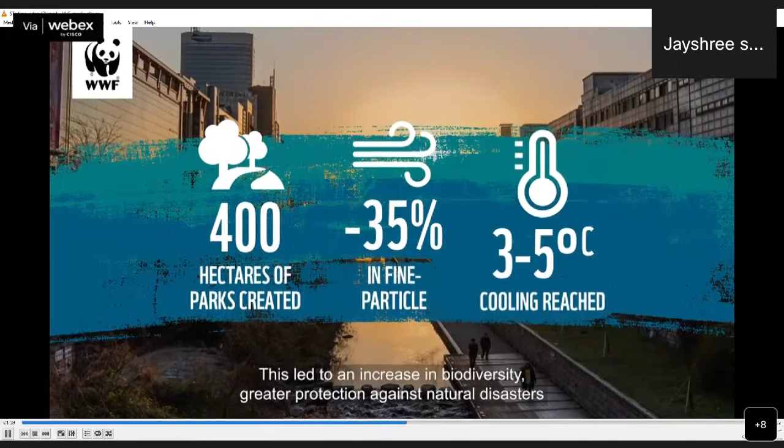Here, the construction of a city highway had buried a once vibrant river under asphalt and concrete, but the highway was removed and the river was restored to its former glory. This led to an increase in biodiversity, greater protection against natural disasters, and many other advantages for both the environment and the people of Seoul.

Across the globe in Medellin, Colombia, the Green Corridors Project has created 36 green corridors between natural areas in and outside the city. These corridors encourage the movement of species, but also have a profound impact on the city itself. Exactly what nature-based solutions may look like depends on the prerequisites and challenges of each city.

Around the world, we find them built into buildings and entire neighborhoods, in the planning of vegetation, agricultural, and forest areas, in the restoration and preserving of rivers, and by the sea to create living shorelines. Cities all over the world, of all shapes and sizes, are now making nature part of the solution.

They have realized that urban nature-based solutions can address multiple challenges, including climate change, biodiversity loss, natural disaster prevention like extreme weather, and food and water shortages. Join us later on when we dive into the different examples of urban nature-based solutions and how they can make our cities even better.

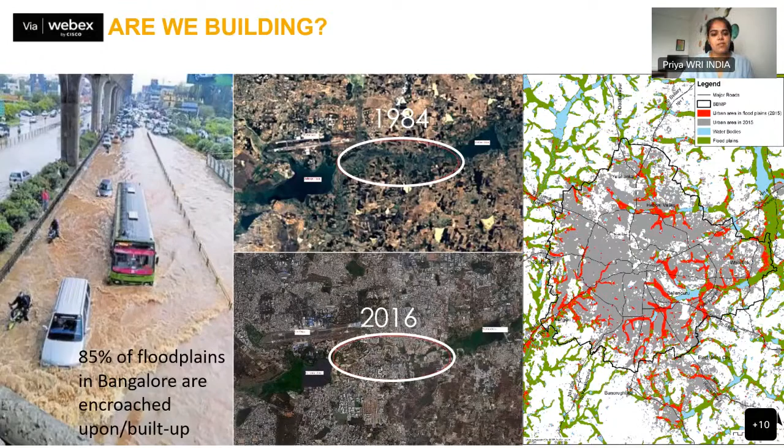I mean, this is there all across the globe. And in the South Asian countries, I think this is very prominent that flooding is a major issue, urban flooding. And the other extreme events, as we all know, 5 out of 20 Indians are highly vulnerable to all three of these extreme events, primarily floods, droughts, and cyclones. And primarily the hydromet disasters are in a way human induced, especially in the urban areas.

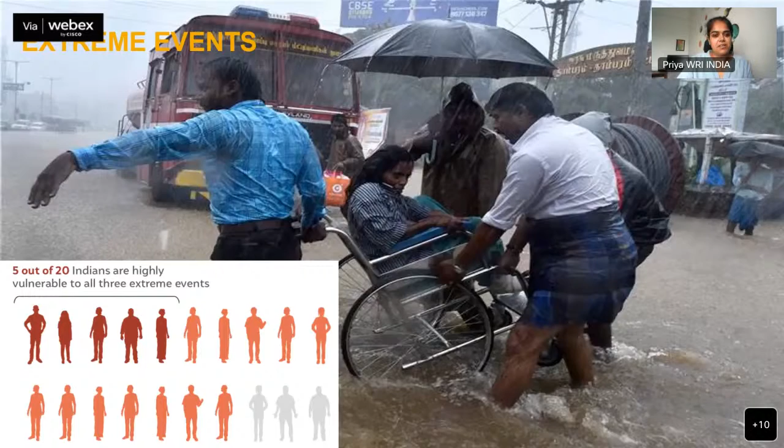And this is just a glimpse of how heat really is impacting millions of Indians, and this is going to be the major disaster in India in the coming years. And the biggest opportunity for us, 75% of India's infrastructure is yet to be built. So there's a huge potential for twisting all our grey infrastructure into a hybrid green-blue integrated infrastructure. So that's the biggest potential for Indian cities.

And I'm jumping directly into nature-based solutions, and what it encompasses, I think everybody is aware of, and what it addresses is societal challenges, climate change, poverty, resource efficiency, and use. So there's a large amount of data and evidence to show that nature-based solutions at multiple scales really have immense impact. So at the plot level, at the neighborhood level, at the city level. So they have their own ways of mitigating and adapting to climate change.

So simple infrastructure changes like having a permeable paver rather than a cemented paver really would help a lot of cities in mitigating, I wouldn't call it flooding, but just waterlogging in front of their houses or offices, etc. Just having simple rainwater harvesting percolation pits would also really mitigate waterlogging.

Rooftop gardens, home gardens, these are small measures that could really not only be beneficial for the environment in the long run by mitigating heat effects, but also be useful in rainwater harvesting and also in increasing the biodiversity in the city space. So these are just examples of how at the plot, neighborhood, and city level, these small interventions really can impact and help mitigate climate change and also improve basically the entire ecological space.

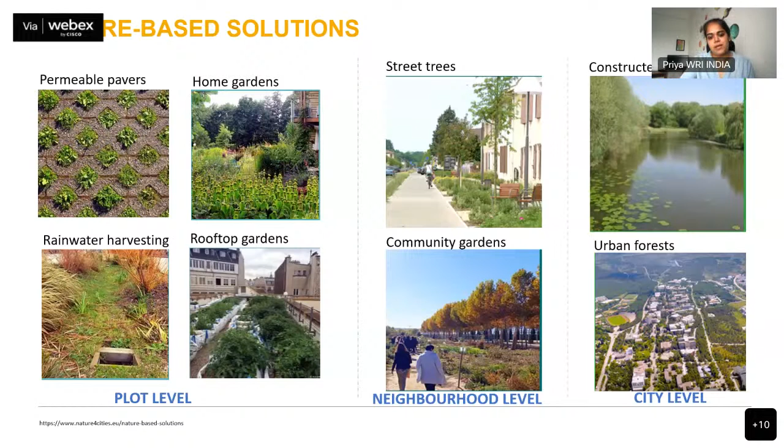So at the city level, constructed wetlands and urban forests, these are really big interventions that can help carbon sequestration, help completely recharging the hydrogeological cycle, and the constructed wetlands can even act as pisciculture areas or aquaculture areas, which could really promote the livelihood also in the areas around. So these are some examples of nature-based solutions at multiple scales.

And I really don't have to reiterate the core benefits of NBS. So one is carbon sequestration, improved biodiversity, increased access to green spaces. I think through COVID, that's one of the things that has come up. Access to green spaces is something we all look for, mitigating heat and also mitigating flood. And how do you prove that NBS is effective?

There's a lot of evidence, and within India, we have the Smruti Van, or the urban forest in Pune. So this really is an example of how the community, the municipal corporation, and the neighborhood intervention has resulted in having a beautiful urban forest within the concrete jungle in a city. And there's another example from India, that is a rain garden under the Begumpet flyover. And there are multiple other examples across cities in the world.

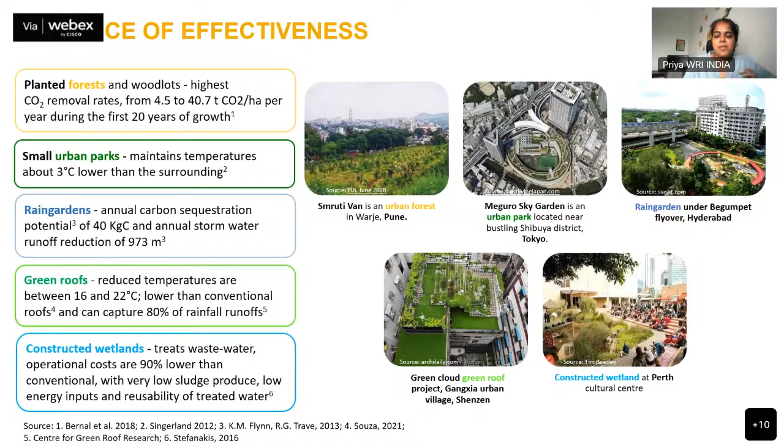And on the left, you would see how these small scale interventions really reduce the temperature and improve carbon sequestration potential. Having a constructed wetland to treat wastewater reduces operational cost compared to having a conventional wastewater removal mechanism. So these are some evidences of effectiveness of having nature-based solutions.

And this is just a very small example of how the urban horticulture initiative in Chennai, the rooftop gardens, is really trying to improve the heat resilience in Chennai. So this is a small program which is trying to utilize the rooftops and vacant spaces, and also capacitating people to empower themselves to not only produce their own food, but also use it as a means of self-employing themselves. So these are all small urban examples that are happening in India.

And regardless of the amount of co-benefits that nature-based solutions have, there are some very key challenges to operationalizing these urban nature-based solutions.

And one is the limited number of solution providers. So I think the platform is really going to open up space for more solution providers to come in. And the other is unavailability, inadequacy in land. So land for implementation is something that we realize, when it comes to NBS, the cities are often very dense and land becomes a very big question.

The other is lack of ownership and maintenance. So this is one very important thing, because through the life cycle of a project, just implementation of a project, or starting up a tree planting drive or water clearing or restoring a water body, is not enough, but the operation and maintenance and ownership of that space needs to be taken.

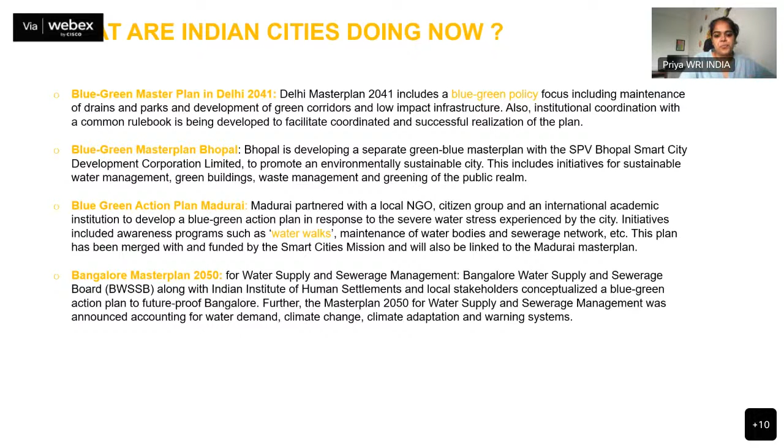So I'm just jumping into what we have been doing, because this is one example of how we've tried to operationalize NBS. Just to give you an introduction of the Cities for Forest platform: Cities for Forest is a global initiative, and 3 cities in India have signed on to it: Kochi, Mumbai, and Hyderabad. In Kochi, we started on ground, enabling the Kochi Municipal Corporation to move towards a resilient city and shaping a resilient city chapter for Kochi.

And then around 2020, we conducted a Mapathon, tried to identify spaces that have the potential for tree planting or any other kind of restoration activity. In 2021, we did the implementations on ground, and by 2022, we have really enabled the city to include in the municipal budget specific funds for taking up activities towards mitigating and adapting to climate change.

So I'm showing this example because to operationalize NBS, one of the key things that we understood is that it's not about these small piecemeal projects that we do on ground, but how are we going to really help cities take this forward? And cities can only take it forward if they earmark funds, if they take climate action seriously and put it in their municipal budget, or if they are able to redirect their finances from the state climate action plan, or from any other mission that the state and national legislations provide them.

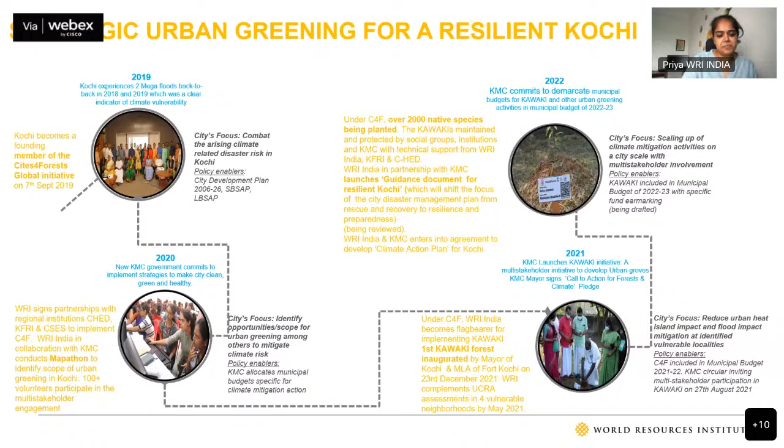So unless they have the capacity to say that we have this issue and this is a major issue that we want to take climate action and really look forward for the budget, to do any kind of implementation, water body restoration, or any kind of activities on ground, it becomes really difficult. So we strongly believe that we need to really influence the policy mandate at multiple levels, be it at the local body level, or at the city, or at the state level.

So just in a way of that, we launched the India Forum for Nature-Based Solutions. This is what WRI launched along with NIUA and a host of other partners. We launched it at the World Urban Forum at the end of June. Here we're trying to bring across India a similar language on NBS. Like I said, people are always talking about ecosystem-based services, adaptation, everything. So we're trying to get this shared language of what NBS really is, redirecting investment towards NBS, because like I said, the gestation is too long.

And how do you really help the investors to invest in an NBS, or invest in a solution that is useful for the cities, and influencing national, subnational policies, and mainstreaming NBS itself in the city planning process. So these are some things that are in progress through the India Forum for Nature-Based Solutions. And we have a bunch of people here: public, private, academia, NGO, and citizens. And we are primarily focusing on the private investors.

At the city level, we are focusing on the municipal corporation, who are able to then identify one or a few bankable solutions, and they're able to move towards these investors and say that we really need to, for example, restore the canals in Kochi, or some green space in Jaipur. So we are able to influence these cities to ask investors what they need. It's not private investors' pilot implementation, where most often there's no ownership from the city. So we are just trying to push through the forum and through the Cities for Forests platform that all are city-led, community-led, and it does not go in a standalone manner.

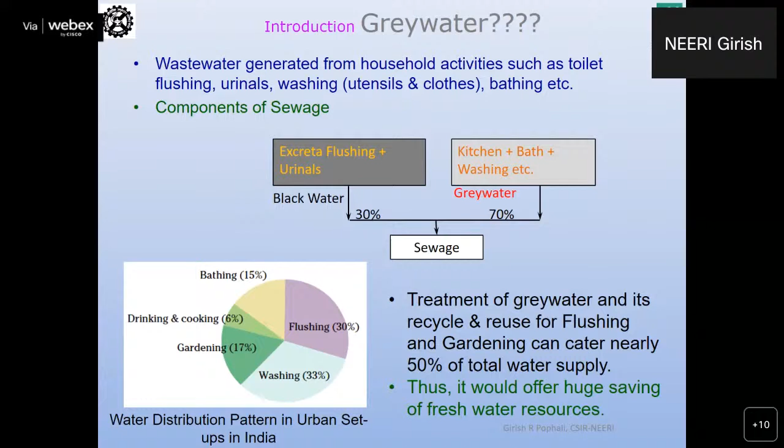This is a very important aspect of governing regulations, because we need to know to what level we require treatment of sewage or grey water, because that decides the treatment method selection. For sewage, we do have discharge standards, which are now referred to as NGT norms, because these norms have yet to be notified by MoEF and CPCB.

So, for example, we have these norms: BOD less than 10, suspended solids less than 20 or 10, COD 50, total nitrogen 10, total phosphate for discharge into ponds 1, fecal coliform desirable 100 and 230. So these are the norms available for sewage. Next slide, please.

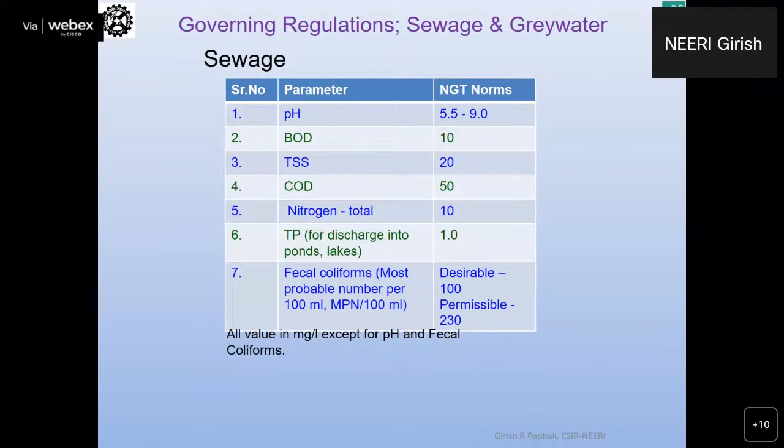But as far as grey water is concerned, there are no specific standards for treatment and recycle or reuse for grey water prescribed as yet in India. There is one report or manual prepared by CSIR-NEERI along with UNICEF in 2007, in which suggested guidelines were prescribed for grey water quality, but that is related only to bacteriological quality, and one only reference of BOD, that is also from CPCB, that is class A water.

So as such, we do not have any standard or treatment method which will say that to this level we should treat gray water, and then that will be useful or fit for recycle and reuse. So whatever gray water treatment is being done presently, we are using only the sewage standards to that level we are treating. So this is a very important aspect if you want to manage gray water and reuse it for any non-potable or for that matter any potable purpose. So this is one important aspect in gray water treatment and management. Next slide, please.

A brief about nature-based solutions. The environmental cleansing mechanism that ensures reduction of pollution levels by means of physical, chemical, and biological transformation without any human intervention can be referred to as a nature-based solution. Some of the examples include inert solid removal through filtration; this is a physical process. Metal removal through soil sorption is a chemical process. Nutrient uptake by plants, that is phytoremediation. And organic matter removal by microorganisms is a biological process. So NBS is basically a combination of all these processes which we imitate from nature.

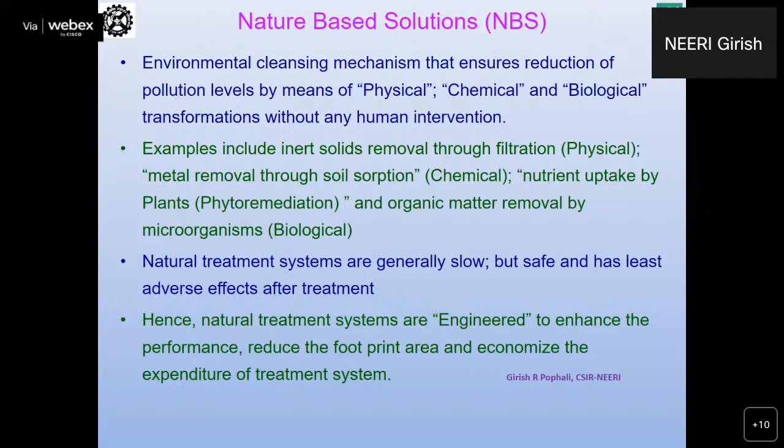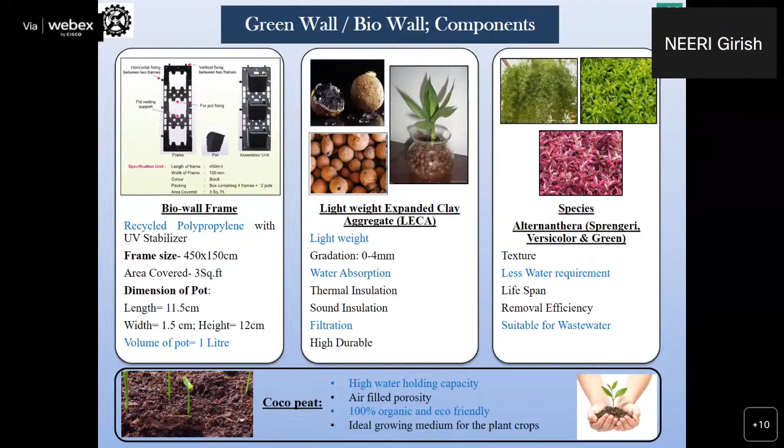Another filter media used to fill the pot is coco peat. It has high water holding capacity. Due to porosity, some air is also filled, and it is 100% organic and eco-friendly. So these two combinations of coco peat and LECA offer a physical process of separation of solids. It also helps water to be retained in the filter media and allows some microbial growth, and thereby some organic matter is removed. So physical process takes place, biological process takes place, and the plant uptakes the nutrients. So this is the function of the green or bio wall. Next slide, please.

Yeah, this shows the experimental setup and wastewater, grey water characteristics. If you look at the characteristics of grey water, they are quite dilute as compared to sewage. It has BOD 48 to 70, COD 64 to 92. Normally, if it is sewage, it varies about 150. If it is for sewage, COD goes about 250 to 300.

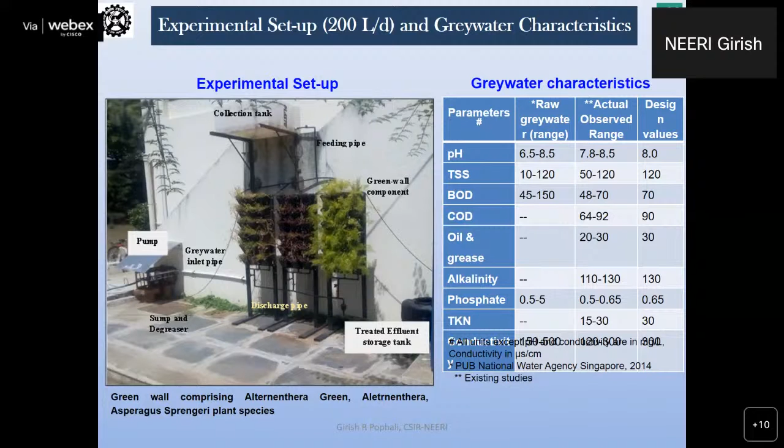So BOD of 70 was reduced to 48, COD from 90 to 68, and oil and grease was also substantially removed from 30 to 16. So it resulted around 40 to 47% removal of oil and grease at the outlet of the degreasing tank.

So the idea is we must analyze the characteristics of grey water, because grey water characteristics vary hugely, because they originate from different sources. So we don't know from which sources we are collecting. If it is from all the sources, then the grey water characteristics will be different. But here in this case, it was only from the bath area of that swimming pool. That's why we have prominent oil and grease in this section. Next slide, please.

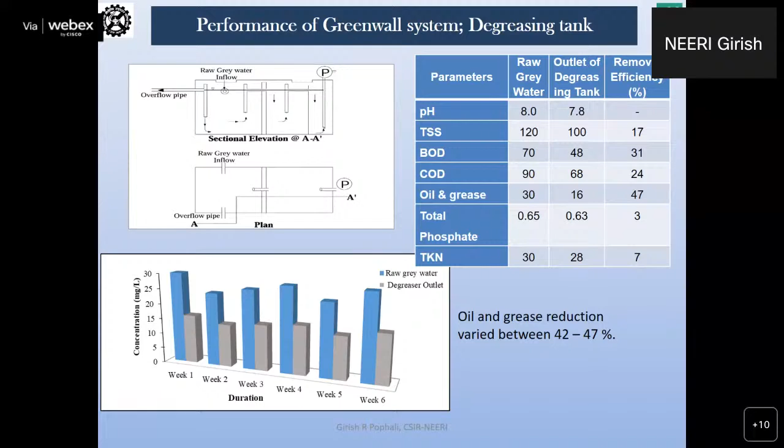Then, well, I have a lot of data on this, but I would like to cut short just to show you that treatment with light expanded clay aggregate, that is LECA, we had good performance, satisfactory performance in terms of COD, TKN, and total phosphate removal. But BOD removal was not up to the mark. But again, up to the mark means we had no standard, so we compared with the NGT norms, and in that aspect, BOD was not reduced to less than 10 milligram per liter.

The reason was our maximum retention time was around 12 hours with that LECA soil. So to increase the water retention and subsequent treatment efficiency, we used coco peat in equal proportion that was mixed with LECA. Next slide, please.

So after using combination of LECA soil and coco peat in equal proportion, we got very good water retention capacity, and then we could run the system at different hydraulic loading rates, or you can say hydraulic retention time. You can see that it started from 18, 16, 14, and 12 hours. We first loaded the system with minimum flow that resulted in maximum HRT, and subsequently we went up to 12 hours retention time. And then we observed that combination of LECA and coco peat provides higher water retaining and hence higher hydraulic retention time, which enhances the performance of green wall.

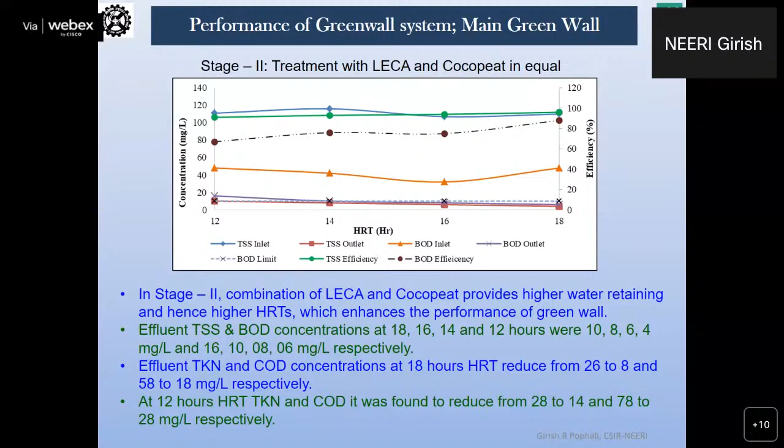So this indicated that grey water treatment is possible using green wall, which offers around 14 to 16 hours retention time. We can substantially treat it, and that will give us that quality of water which can be reusable in garden, or at least for toilet flushing, which will not have any adverse effect. We have also monitored the fecal coliforms, which were also reduced to less than the permissible limit of 230 and 100. Next slide, please.

So, advantages of nature-based solutions, which are quite obvious. They are highly techno-economical and environmentally sustainable, and require low capital and O&M costs. They do not require skilled manpower. All that you have to do is to just provide these plant-based media, and you have to just set the flow rate, and automatically water gets filtered.

Significant treatment efficiency with the removal of primary and secondary pollutants. The treated effluent can be used for non-potable purposes like gardening, floor washing, flushing, and green belt development. And in particular, if you have a lot of green wall systems, they can significantly reduce the fresh water demand, reduction in carbon footprint area. They also help in temperature control, and of course, they are aesthetically and socially acceptable and economically feasible.

This particular system was set up at only around 20,000 rupees for 200 liter per day capacity. So you can see that you can save a lot of fresh water, which is otherwise used, and that cost can be recovered if you save that fresh water cost, because fresh water costs you around 20 rupees per meter cube in urban setups.

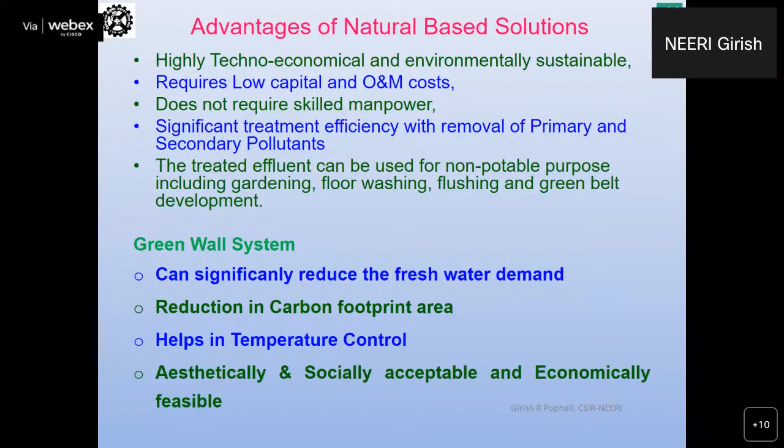Next, please. So some conclusions and recommendations. Grey water treatment and management using green wall gives us an opportunity to conserve the environmental resources and serve the society at large. Government bodies, public sector, private industries, and municipalities can target to conserve the fresh water using grey water treatment and reuse for non-potable purposes.

Another important recommendation would be it is essential to formulate treatment and discharge standards for grey water with recourse to recycle and reuse, because presently we do not have any target value. So to what level we should treat it so that it will be amenable for recycle and reuse.

I did not include some of the conventional technologies which are also prominent in grey water treatment, since the topic is on nature-based solutions. But there are certain technologies like simple filtration or sedimentation using chemical coagulation and flocculation. But those methods actually create another problem like sludge handling. So the natural system or the green wall concept has an edge over conventional systems. That's also one of the important advantages of nature-based solutions.

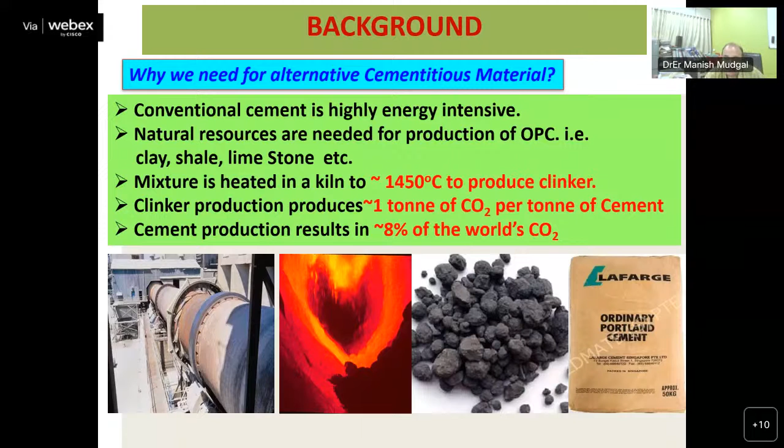So the background is why we need alternative cementitious material. I told you that cement is highly energy intensive. Around 1450 degrees centigrade temperature is required to produce clinker, 1 ton of cement produces around 1 ton of carbon dioxide, and cement production results in 8% of world carbon dioxide. So you can see it's highly energy intensive, and it is not an eco-friendly process.

So we have thought of using fly ash as an alternative material for development of this technology. And what is fly ash? Fly ash is a byproduct of finely divided residues resulting from combustion of pulverized coal in thermal power plants. And in India, we are generating 226 million tons of fly ash per annum.

Friends, we are producing 230 million tons of cement per annum in India. So the amount of cement production is equivalent to the amount of fly ash generation in India. It is an aluminosilicate material with a fine particle size distribution, a combination of glassy and crystalline phases, and it has

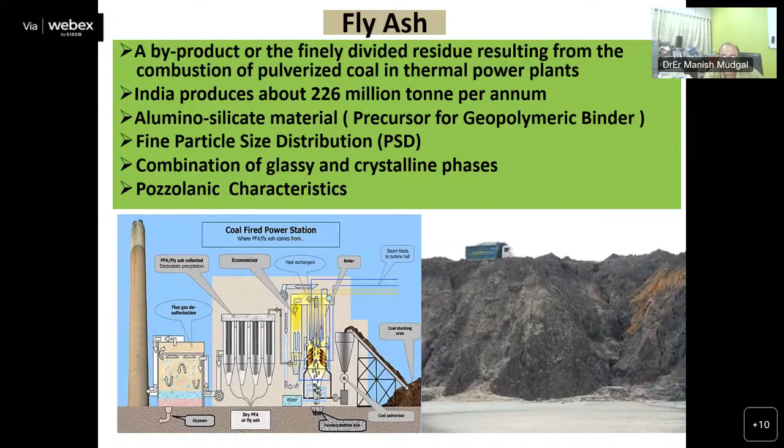pozzolanic characteristics. The data we got from the Central Electricity Authority, New Delhi, 2020, is that we are generating 226 million tons of fly ash from 197 thermal power plants in India. If you see the forecasting, in 2030-31 we will produce around 600 million tons of fly ash in India. So you can imagine the quantity of fly ash that will be generated in India.

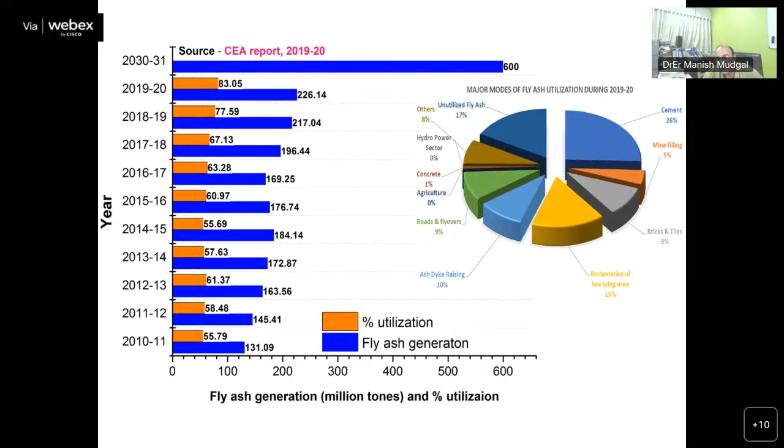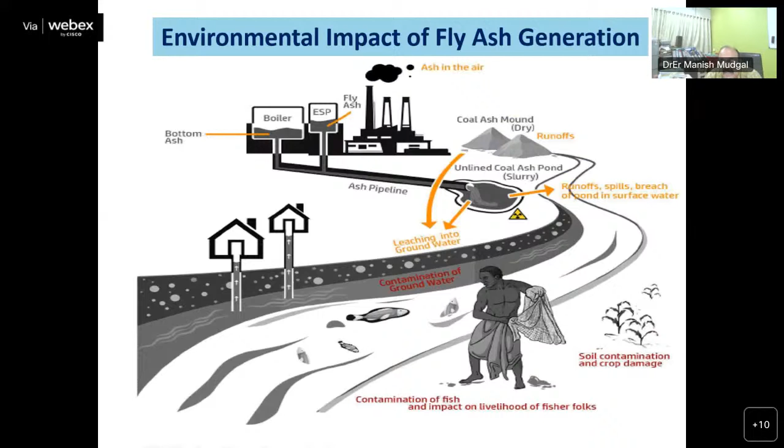The utilization is very minimal, and I have shown you utilization of fly ash in different sectors. The environmental impact of fly ash generation is on the air environment as well as the water environment and land environment, and if we throw the fly ash on the ground, it will degrade the environment in all aspects.

It is only a change of mindset. For the last 200 years, we have been using cement concrete. हम जो घर में सोते हैं, हम घर में रहते हैं, that is made of cement. Dear friends, I am just telling you, we have the confidence to sleep under a rooftop made of concrete. Our mindset is at the level that we are confident this will not fall down. So इतना confidence होने के बाद we are sleeping under that rooftop.

Now there is a need for a change in mindset, that this waste can be utilized to make wealth out of it. And how can we do it? We can do it by converting it into geopolymeric binder. I have been working in this particular field for the last 15 years. I have guided around 25 MTech students and 5 PhD students on this geopolymeric concrete work and R&D development, and carried out a number of projects on the development of this technology.

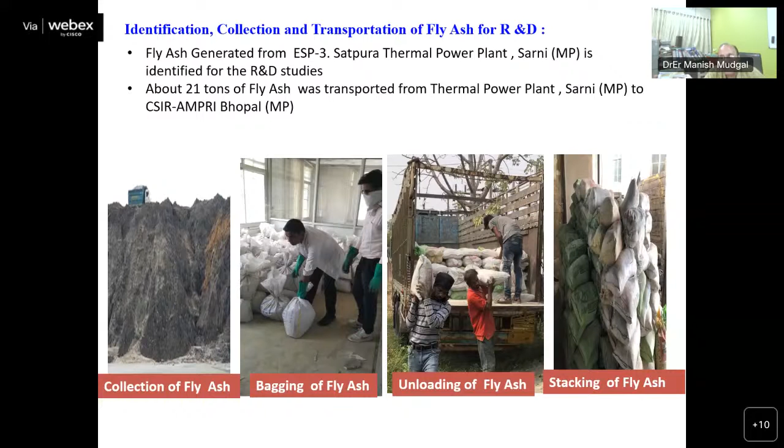I am working on bulk utilization of waste. That's why we have collected around 21 tons of fly ash from the nearby thermal power plant at Sarni, a Government of MP thermal power plant. We have characterized this fly ash and found that it is a silico-aluminous material. Silica content is 58.63%, alumina 27.7%, and iron oxide 6.5%.

If we go through the Indian Standard IS 3812 Part 1 for pulverized fuel ash specification, where this ash is added with cement to make pozzolanic Portland cement, as per this IS code, if the combination of silica, alumina, and iron oxide is more than 70%, it is class F fly ash. So the fly ash we have collected from this thermal power plant is class F fly ash.

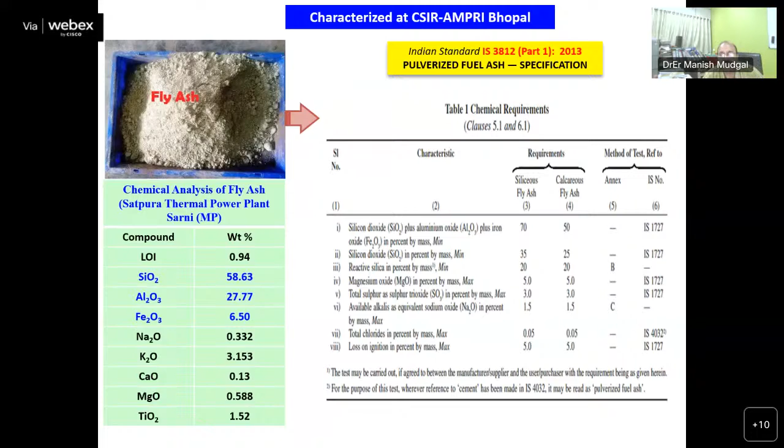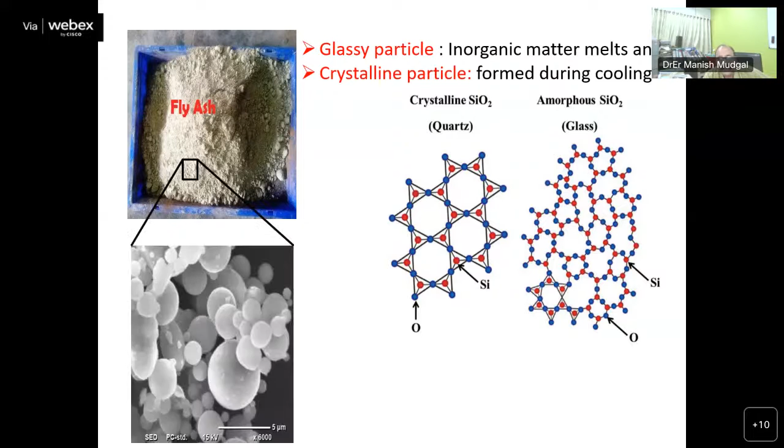We have thoroughly characterized this fly ash with XRD, particle size distribution, FTIR, scanning electron microscopy, and even transmission electron microscopy. It contains glassy particles and crystalline particles, basically quartz and amorphous silica. And this is the base material we have used for geopolymer making.

So what is geopolymer? It is a green material. It generates 80% less carbon dioxide, with low consumption of energy and water, better durability, a simple process, and a wide range of applications. That's why it qualifies as a green material. Professor Joseph Davidovits from France is the inventor of this geopolymer.

In 1978, Davidovits proposed that an alkaline solution could be used to react with silicon or aluminum in a source material of geological origin or in any byproduct material such as fly ash, rice husk, or clay to produce binding material. So he said that if any silico-aluminous material is reacted with alkaline solution, the binding material will be a viscous binder, and he coined the name geopolymer.

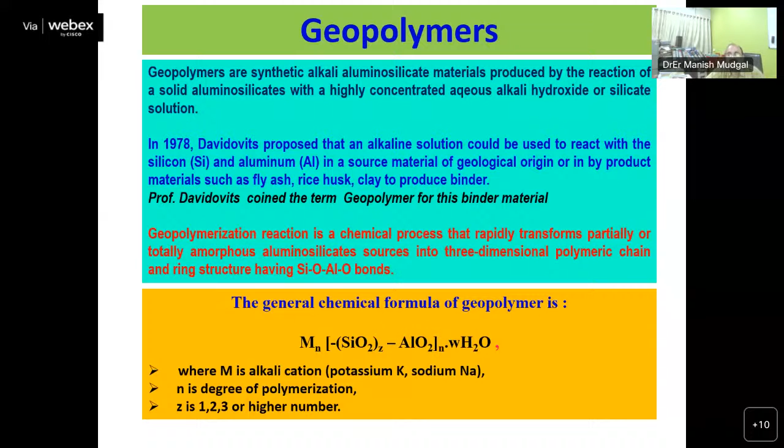It is not an organic polymer. It is an inorganic polymer. You can say it behaves like a polymer material. So the geopolymerization reaction is a chemical process that rapidly transforms a partially or totally amorphous aluminosilicate source into three-dimensional polymeric chain and ring structures having Si-O-Al-O bonds.

The aluminosilicate material can be fly ash, slag, metakaolin, silica fume, or rice husk ash. Any one of them can be utilized. The alkaline activator may be sodium hydroxide, potassium hydroxide, sodium silicate, or potassium silicate. And if we see the mechanism, it involves solid dissociation, polymerization, gelation, setting and hardening, and solid state transformation of aluminosilicate gel.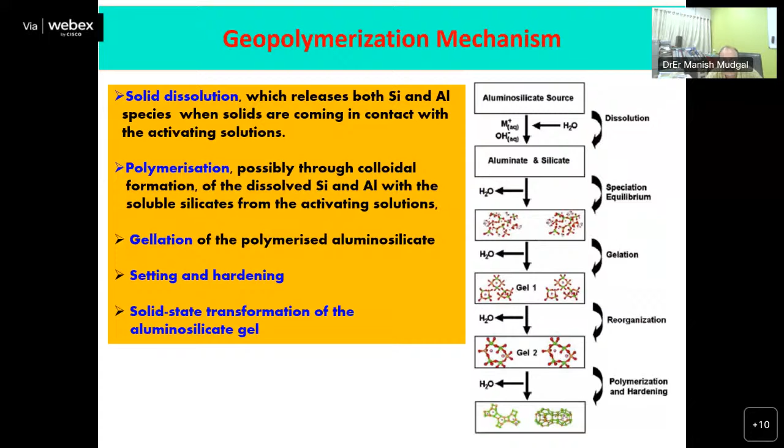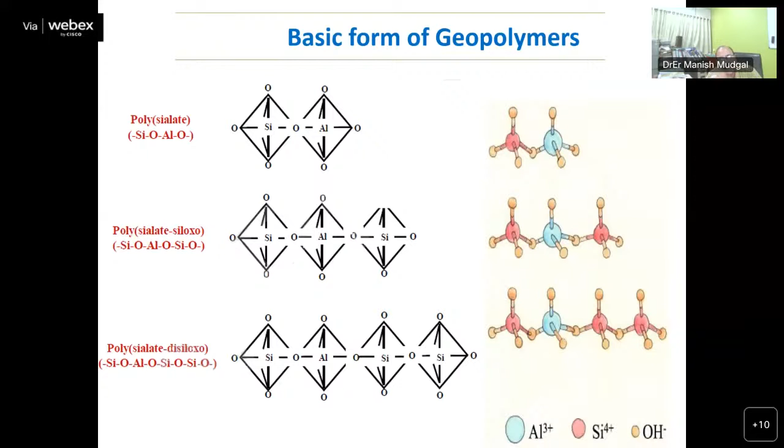Basic forms of geopolymers are polysialate, polysialate-siloxo, and polysialate-disiloxo; different stages are there. Two different scientists, Davidovits and Barbosa, have given different models. The basic raw materials required for this geopolymeric concrete are class F fly ash, as I told you, sodium hydroxide and sodium silicate, and the conventional fine and coarse aggregate we use in concrete.

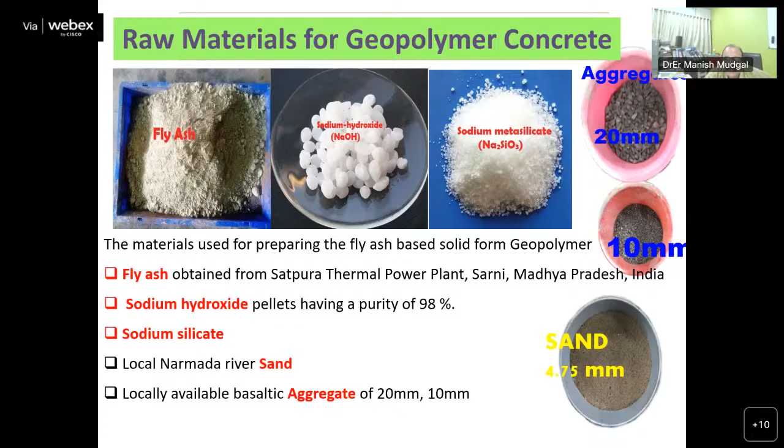Friends, if we compare Portland cement and geopolymer binder, Portland cement needs 1450 degrees centigrade for making clinker, while for this process we only need 35 to 80 degrees centigrade. So cement production is an industrial production; this concrete can be made at your doorstep. In Portland cement, when we add water, there is C-S-H gel formation to harden it and get the strength.

Whereas in this system, there is formation of a Si-O-Al bond 3D network, and only with the drying mechanism you can get the strength. So this geopolymeric concrete does not require any water curing. We have calculated the carbon dioxide emission from this geopolymeric binder: it generates 83% less carbon dioxide, only 0.17 tons of carbon dioxide per ton of geopolymeric binder.

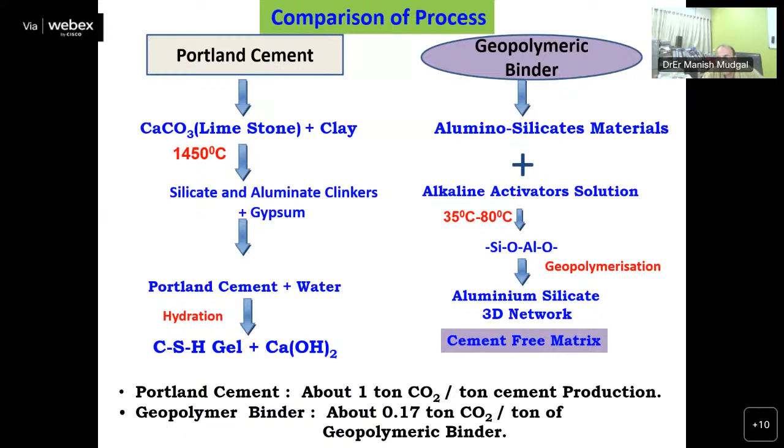If we compare the engineering properties, this concrete is segregation-free. It does not require water curing. Another advantage is that it is high temperature resistant. It is resistant to sulfate and acid, with low shrinkage, low thermal expansion, low creep, and excellent durability. What I have shown you till now is the R&D part and literature review.

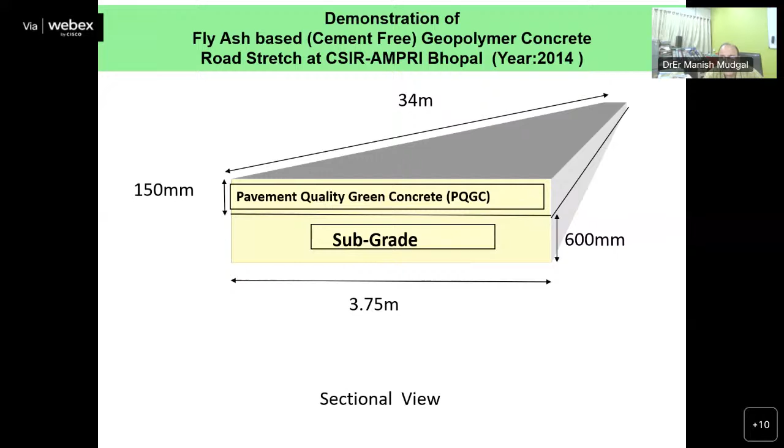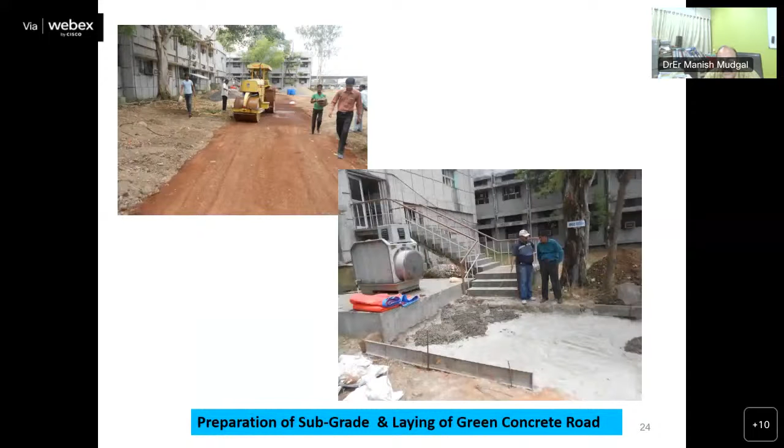After developing this binder, my colleague scientists asked me to do a demonstration in the campus. So in 2014, we demonstrated a 3.75 meter by 34 meter road stretch in our campus. These are the photographs of 2014. By physically seeing, you cannot differentiate between this concrete and cement concrete. The color is the same because fly ash color is similar to cement. And we could do this demonstration with conventional equipment.

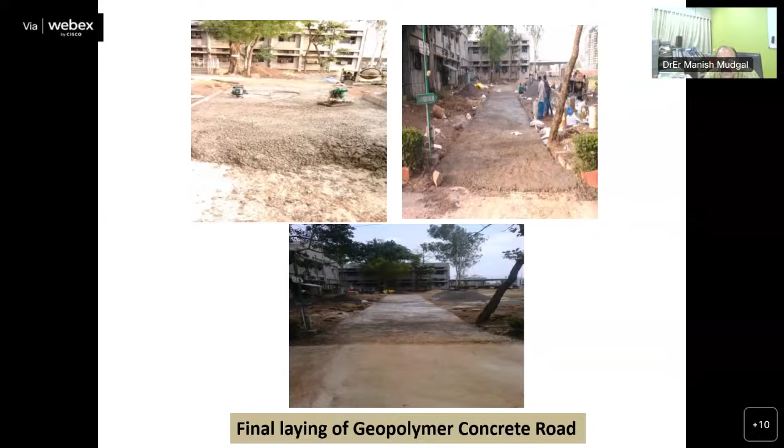The road patch we demonstrated in 2014 had a strength of 35 MPa and flexural strength of 4 MPa. At that time, the slump of this concrete was very low, because we made it with liquid alkaline activators. This is the limitation of this process: its workability is very low, it requires 35 to 40 degrees centigrade temperature, and bulk handling of alkaline activator solution is needed. In this demonstration, I used 8 tons of fly ash.

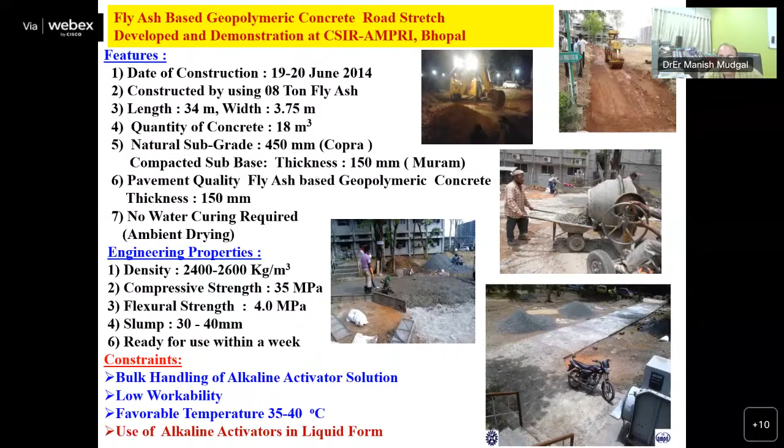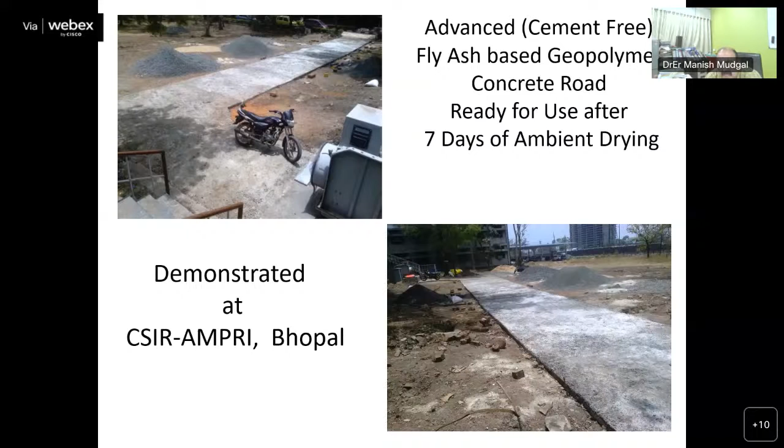Friends, this road is still being utilized in my campus, used by my colleagues in AMPRI Bhopal. Every year we go for core cutting of samples, and the strength is increasing day by day. Now the strength of this road stretch is M39, meaning 39 megapascal.

Then we improved this process and fine-tuned the technology, and with the improved process and a solid form alkaline activator, we demonstrated this road stretch at the All India Institute of Medical Sciences, Bhopal. This is the RM800 plant we used. These are the photographs of the demonstration of cement-free concrete road at AIIMS Bhopal in 2017.

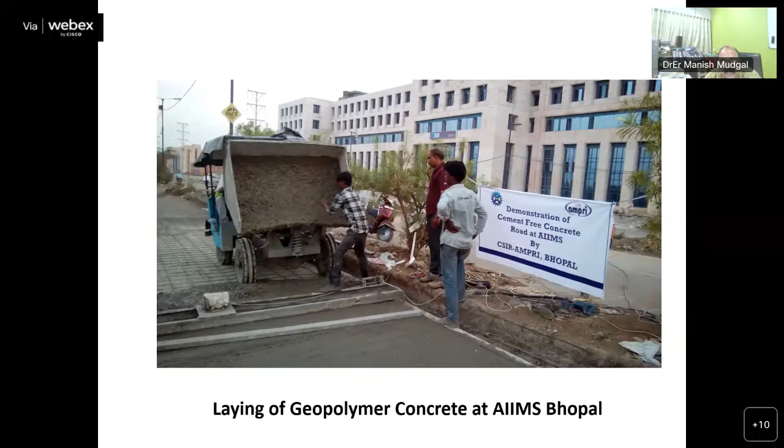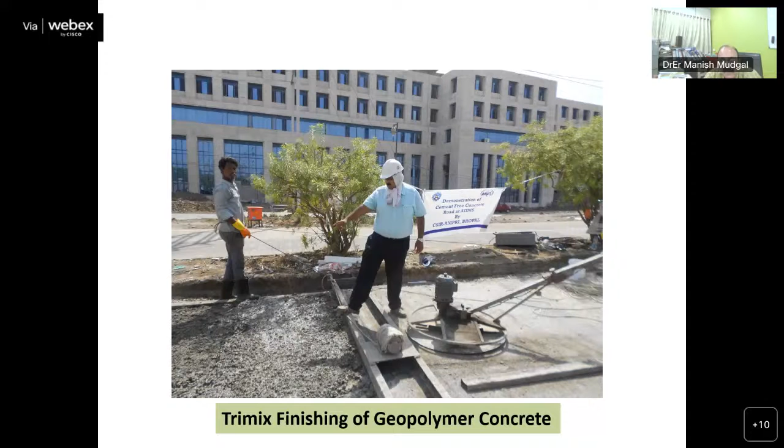Now you can see, with the conventional road construction equipment, with the help of the Central Public Works Department, we have demonstrated this particular road stretch at AIIMS Bhopal. And you can see within 2 days of time, we have demonstrated around a 23-meter patch in AIIMS Bhopal, and still the strength was 35 MPa, flexural strength 4.2 MPa.

At this particular time, we could develop a superplasticizer for this particular concrete, and the slump we could achieve was 120 to 130 mm, meaning workable concrete we could make at this stage of development. And after 7 days of drying, this road was ready for use.

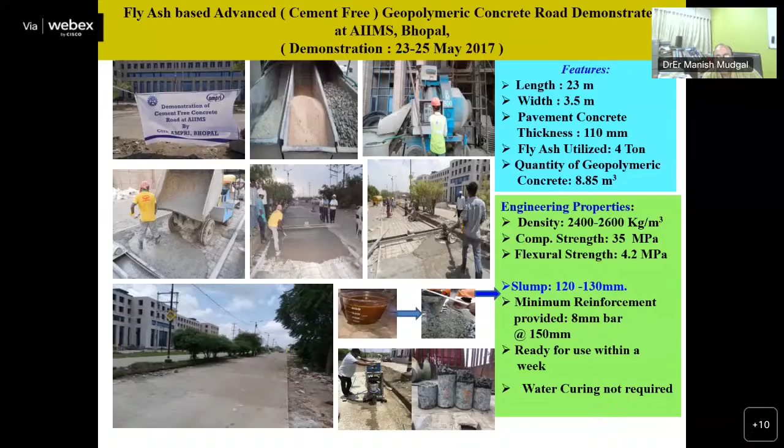Post-performance studies were carried out for 4 years, and these are the photographs in December 2021 of the fly ash-based concrete road, and in parallel we constructed this with cement concrete. In the fly ash-based geopolymer concrete, the crack pattern is very minimal, shrinkage is low, thermal expansion is low. Because of this, we could make a very durable road for all weather conditions.

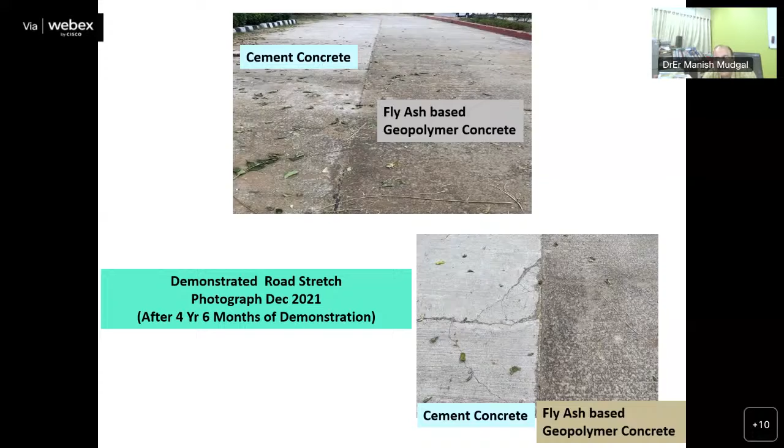The major raw material utilized in this particular concrete is fly ash from the electrostatic precipitator of coal-based thermal power plants, conforming to IS 3812, alkaline activators, and conventional coarse and fine aggregate. Major plant equipment required is a concrete mixer, vibrator, and conventional construction tools. The limitations I have already told: it's a low workable concrete, minimum required temperature is 35 to 40 degrees centigrade, and it needs manpower for handling of alkaline activators.

So with the development, the salient technical features are bulk utilization of industrial waste, that is class F fly ash, an eco-friendly process with around 80% less carbon dioxide emission, it obviates the need of water curing, an energy efficient process, only at 35 to 40 degrees centigrade you can make this concrete, and it can be made using conventional machinery.

Increased productivity, and strength is achieved in 7 days only, as compared to 28 days required for conventional cement concrete. Cement concrete needs 28 days for development of around 90% strength, whereas in this system we can develop it in 7 days only. The only requirement is 35 to 40 degrees centigrade ambient temperature. Bulk production will provide savings in project cost and duration, and it is an initiative under the Atmanirbhar Bharat and Swachh Bharat programs of the Government of India.

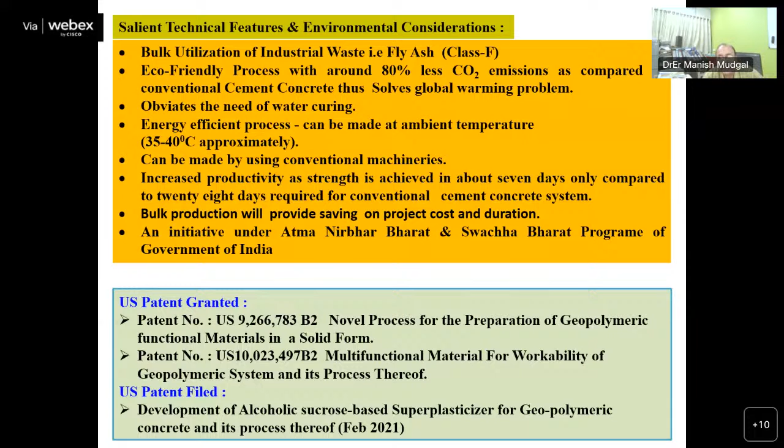I am glad to share that we got 2 US patents granted on this particular technology, and one patent already filed in 2021. There was media coverage of this technology in Dainik Bhaskar on 15th May 2019: "fly ash se bani sadak, cement se zyada majboot."

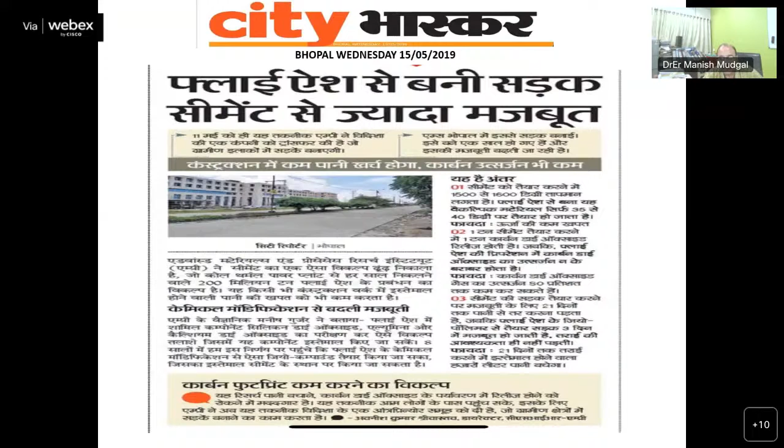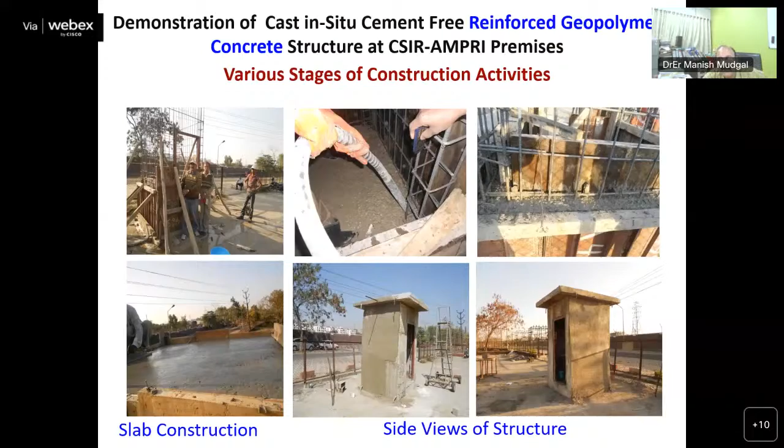Already they are utilizing it, and as an offshoot we have developed high strength paving blocks with 50 mm thickness with this concrete. We have also developed a reinforced green concrete structure, and it is there in our premises. These are the photographs of that structure. And I would like to share that this is the first structure of the world.

It was shared by Professor Davidovits in 2013 that CSIR AMPRI is the first to make a reinforced green geopolymer concrete cast in situ structure in the world. So although it is very small, it is the first structure of the world. We are studying the durability of this concrete on this particular structure.

And why I am telling you it is a durable concrete: it is proven, it is in literature, that the Egyptian pyramids were made of a similar type of geopolymeric material. So it is proven that geopolymer has more durability than the cement concrete system.

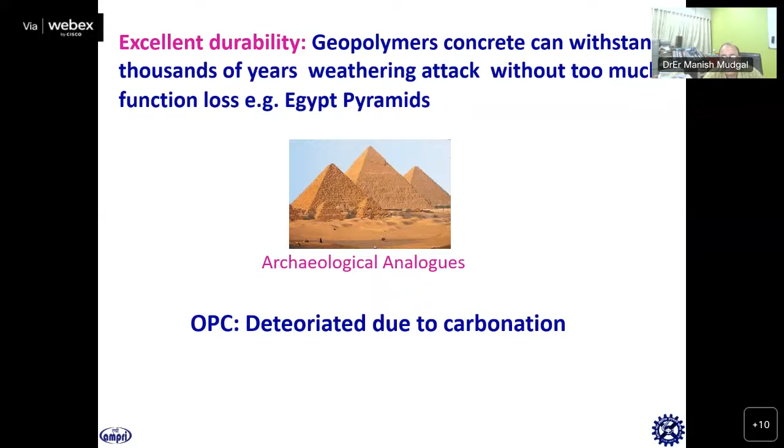Friends, with continual development and with the help of the Ministry of Environment, Forest, the Department of Science and Technology, DST, and the Board of Research in Nuclear Sciences, with the mentorship of my director, Dr. Avnish Kumar Srivastava, and my senior colleague, Engineer R.K. Chauhan, we have established a Center for Advanced Radiation Shielding and Geopolymeric Materials.

This center was inaugurated by the then Honorable Minister of Science and Technology, Dr. Harshvardhan, on 13th March 2021. We established this center under a DST-CSIR project of 5.59 crore, sanctioned from DST and CSIR. And in this center, we have established the facility for upscaling of technology in the area of radiation shielding and geopolymeric materials.

This center's objective is upscaling of technology in the area of radiation shielding and geopolymer material utilizing industrial waste for extending technological support to Indian industries. It is working on strategic sectors: nuclear installation and defense.

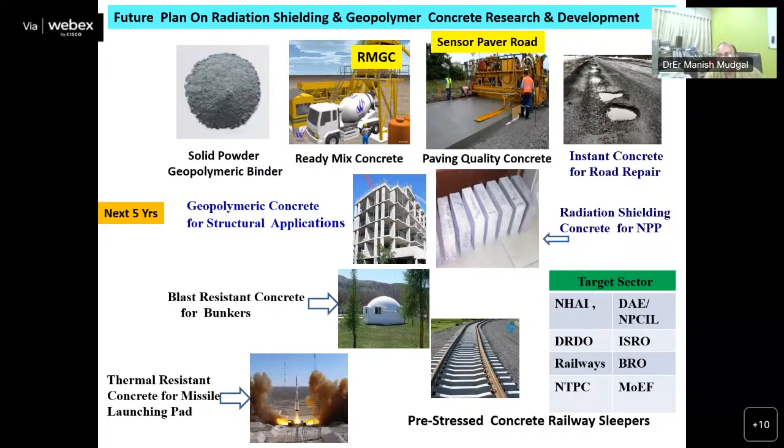So this is the center I was telling you about, the Center for Advanced Radiation Shielding and Geopolymeric Materials. I established this center under this CSIR DST project, and now I am heading this center at CSIR AMPRI Bhopal. Thank you for giving me the opportunity to share my technology. Thank you so much.

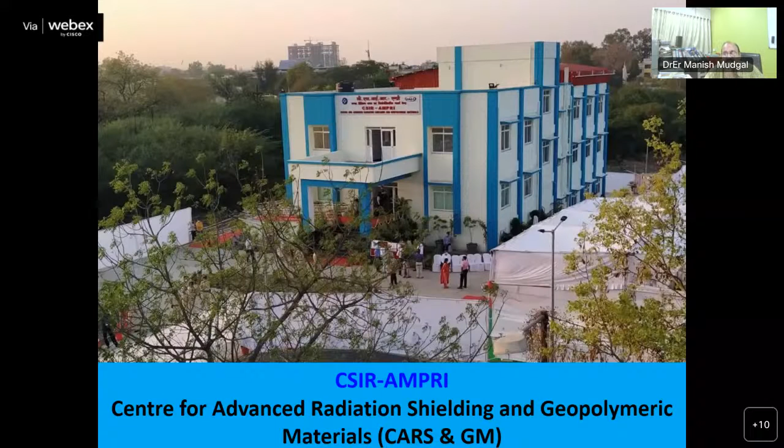Thank you, sir. I think this is a very relevant presentation because it highlights industrial waste, which is a big menace and a headache for a lot of industries. You have also highlighted for whom these technologies are relevant. You highlighted NTPC, and since this event is shared with the NTPC audience, I'm sure they will be watching the live telecast.

One thing I would like to reinforce from your presentation: you talked about how these roads and geopolymeric concrete binders are very relevant for making all weather roads. The Government of India is making strategic connections in border areas with all weather roads, and this is where your technology will play a very big role. With NHAI already collaborating with you, I'm sure we will see a lot of developments in the coming year.

I have a couple of questions from the audience. I'll keep them for the end of this session so we can have more insights about cost effectiveness and heat stress concerns, because we have already highlighted the temperature conditions and how they are also able to reduce carbon emission.

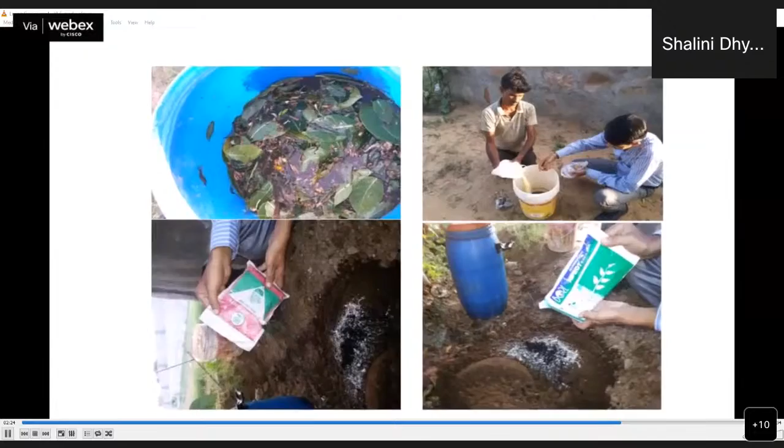at our farm. Third thing, which is very, very important, we offer weekly maintenance support to our customers. And fourth, we also offer an organic kitchen gardening program, which any citizen of the city can enroll himself into. My dream is that every single rooftop that you see here would be a huge, lush green organic farm.

So you might have some idea of what we are going to discuss now. You know that we are losing a significant amount of urban green spaces across the country, not only in our country, but everywhere where you see urbanization is exponential and rampant. So this is not only compromising food security, especially for the people who are migrating to these cities without understanding what livelihood opportunities are waiting for them.

And as Dr. Priya in the very starting of this event already highlighted, urban residents are also having a kind of disconnect with nature. So to enhance nature connectedness, some kind of psychological benefits that we are always searching for in urban areas, and of course, improving the microenvironment condition, especially reducing heat islands, ensuring that everybody gets that kind of right, clean food that our next speaker was talking about in this video.

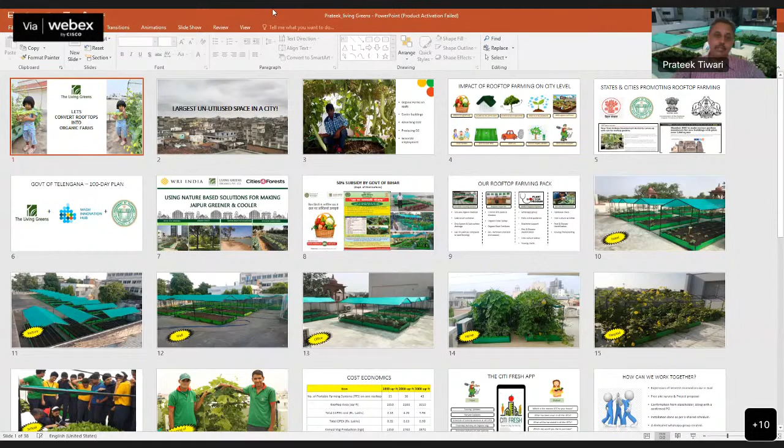My name is Prateek Tiwari, and I'm the founder and CEO of Living Greens. And just like this little girl that you're seeing, I too have been telling the world for the past 10 years that the time has come that we have to convert rooftops into organic farms.

Next slide, please. Next slide, ma'am. Yeah. Can I share my screen? No, it's working.

Okay. So why are we talking about rooftops? The answer is very, very clear. Today, rooftops form the largest unutilized space in a city. You look at any city on this planet, inside any city, the largest unutilized space are the rooftops. And not only are they the largest unutilized space, but there is another problem. This entire unutilized space is directly impacting the urban heat island effect.

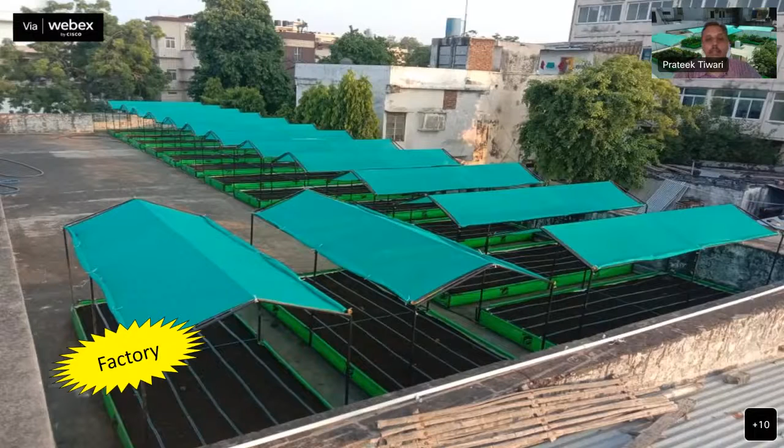Similarly, we are working with factories where the entire rooftop of the factory is being converted into an organic farm. And the most important thing is that because these units are modular, lightweight, and portable, there is no problem in taking a decision to put these units, because even if a factory owner wants to do construction after 1 year or 2 years, each of these portable farming systems can be packed and removed from that factory's rooftop. Next slide, please.

Now, another thing is, mall owners have had an extremely bad time during the COVID times. Today, most mall owners are looking for new ideas for inviting people to come to their malls. I am talking about a vision where the rooftops of malls would have organic farms, and the freshly harvested organic vegetables would be sold through the retail outlets that will exist in those malls.

Now, just imagine if the mall is able to advertise that I have an organic farm on my rooftop and you can get freshly harvested organic vegetables from my rooftop. Imagine the increase in footfall that the mall owner can see. Next slide, please.

Not only malls and hotels, we are even talking about offices. There are many corporate offices which have got very large buildings and absolutely nothing is happening on their rooftop. So besides producing organic vegetables, the rooftop farming project can also offer a stress busting activity for the employees of that office, which means, in simple language, during lunchtime, people can actually come on the rooftop, forget about their commercial and official problems, get down to doing some gardening and undergo it as a stress busting activity.

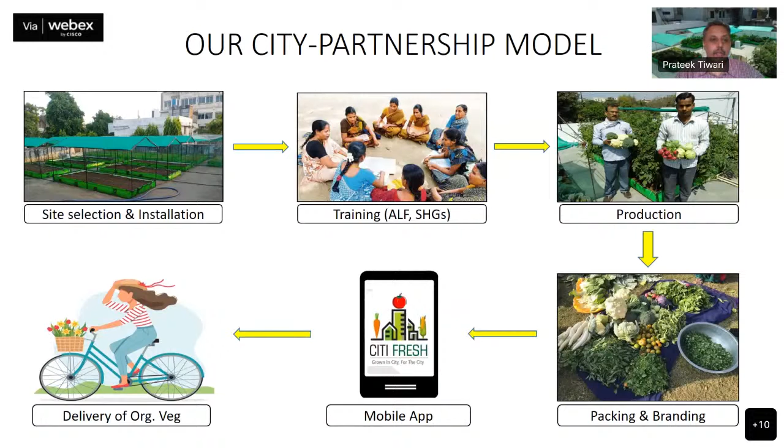Okay, let's move on to the next slide, please. So besides growing organic vegetables, we have a product called a fruit growing bag in which we have been successfully growing organic fruits on the rooftop. Next slide, please.

And for those people who are living in flats, in apartments, but they do have balcony space, we have created a vertical vegetable growing system which enables a flat owner to grow edible herbs vertically in his balcony. Next slide, please.

Dr. Pophali talked about green walls. We have been creating green walls for the past 10 years. We have created green walls for smart cities. We have created green walls for large corporations. And I'm very, very interested in exploring a tie-up with CSIR specifically for that technology of filtration of water using green walls. So I'll be very interested in reaching out once again to CSIR NEERI for that.

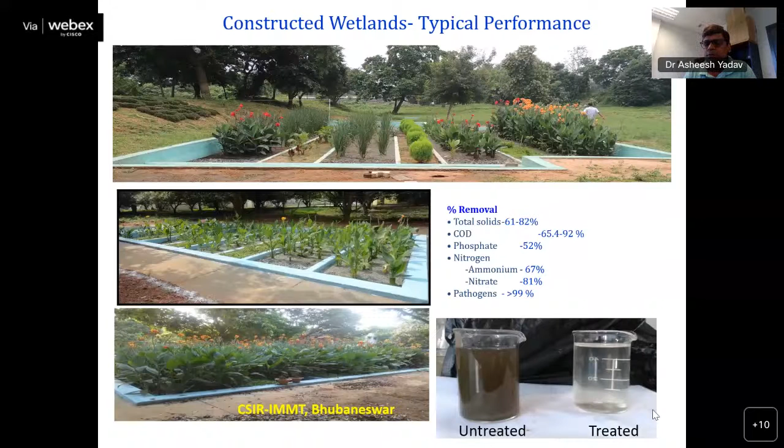If somebody wishes to know more about constructed wetlands, these are simple basins filled with river sand or gravels. On this river sand or gravel, with time, a lot of microbial biofilm is deposited, and we are also using plants in this system. So in a simple way, constructed wetlands are basins where plants, microorganisms, and the physical environment like sunlight, soil, or air interact and improve your water quality. These are very simple systems, but we should design them very nicely.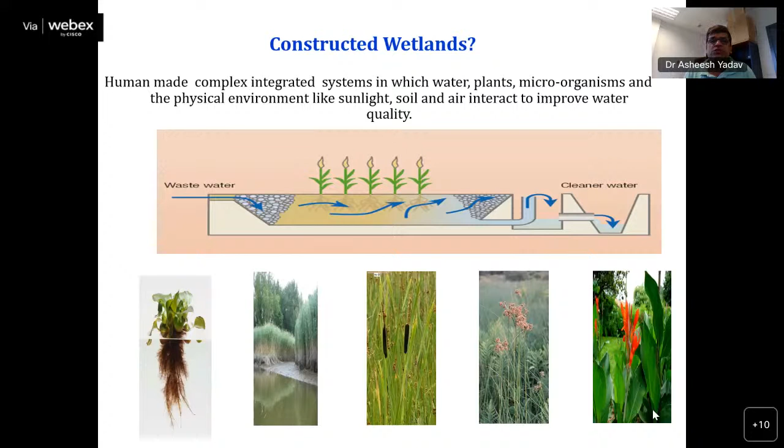So why am I more towards constructed wetlands? There are a lot of benefits, particularly in a developing country like India, because they have very low construction, operation, and management cost, and constructed wetlands do not require very skilled manpower. With some training, you can hire a person with some basic qualifications, and they can easily operate a constructed wetland.

Why are they important? If we consider electricity, a constructed wetland is a completely passive treatment technology, meaning it is not running any process which needs electricity. So without any electricity, you can run your constructed wetland for wastewater treatment applications. You don't require any chemical addition if you are employing a constructed wetland for treating your wastewater. There is no sludge generation, and no machinery is required to run your constructed wetland. So they are completely nature-based systems.

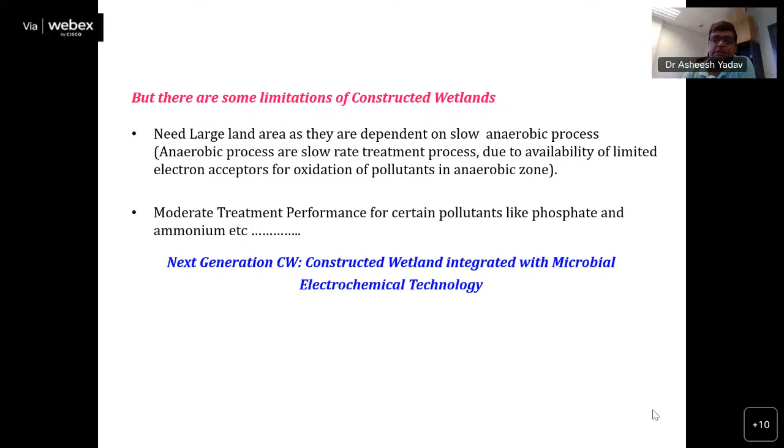So there is a need for a new type of constructed wetland, particularly for implementing in India, because these are very good technologies and we should not ignore them. So there is a need to do more research on this; there is definitely a need. So in this context we started working almost 10 years back in this direction.

When we were doing some of the experiments, we found there is another technology that a lot of researchers are testing at laboratory level. They are like 100 ml or 200 ml, and our wastewater is always in millions of liters or thousands of liters scale. So I will talk a little bit from the lab. That technology is known as the microbial fuel cell, and all over the world a lot of people are working on it because it can generate a little electricity through biological means during wastewater treatment.

But the microbial fuel cell is always a lab-level technology, only working on lab benches. It has not been implemented for any practical application, but still people are interested because it has a lot of exciting things like electricity generation during wastewater treatment. Okay, so in this technology, one part is anaerobic, where anaerobic reactions happen, and the other part is aerobic. In my first or second slide, I talked about electron acceptors. In anaerobic treatment systems you use nitrate or sulfate type electron acceptors, and with that electron acceptor you do the oxidation of the pollutant.

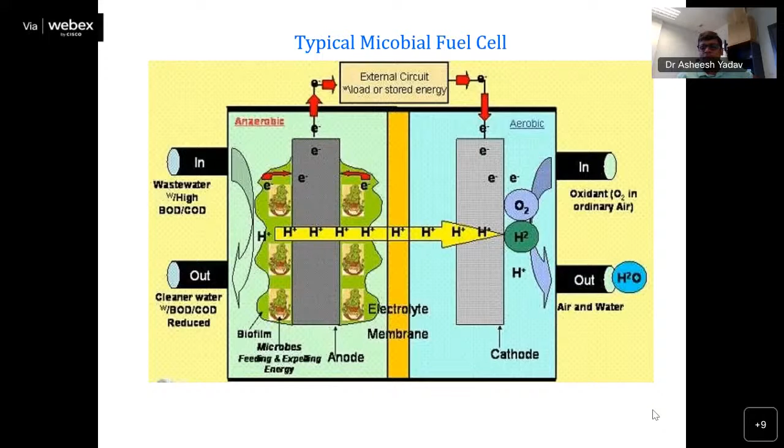Okay, suppose this is your microbial fuel cell, where there is an anaerobic part and an aerobic part, and suppose this is your constructed wetland. In a constructed wetland, a large portion is anaerobic, and that is why they are slow and need a larger land area. In the upper portion, where the constructed wetland is exposed to the atmosphere, you develop some aerobic zone. So the larger portion is anaerobic, the smaller portion is aerobic. And in the microbial fuel cell a similar situation is there. So we thought, why not merge them, and we merged these two technologies; that's why I say it is a coupling of two things.

Okay, so now we are providing conductive material as an electron acceptor or donor, and we made a new type of constructed wetland where we are using electroactive or conductive materials. Okay, so this is the new type of constructed wetland, which has more capacity to treat your wastewater at a faster rate in compact mode.

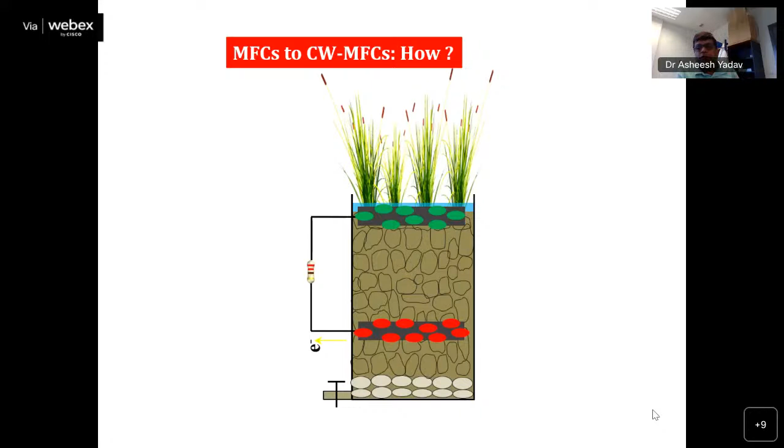So this kind of coupling is very useful, and CSIR IMMT Bhubaneswar has 10 years of experience on this development, and we are really interested to transfer this in the field, and we have several patents in this direction on new generation constructed wetlands, which are fast and will be more compact.

Okay, now moving to another use of constructed wetland. So recently, over the last 3-4 years, we have tested a new model of public toilet. I'm deliberately saying this is more suitable for public toilets. So in public toilets, even if you are building public toilets, if they are not very clean, then people are not using them.

We can experience this situation at every railway station or bus stop. There are public toilets, but people are not going inside because they are not very clean, and people are using the outer spaces for urination and other things. So we realized that in India public toilets are limited in number, but even if you establish a public toilet, if it is not clean, nobody will use it.

So with this thought, we thought, why not use more water to clean our public toilets? And where will this water come from? Then we thought, why not treat the used water, the water which is used in the toilets. So with this observation we started working on this, and we came up with a new type of model of public toilets. In these public toilets, we are deliberately not saying zero discharge. Zero discharge means nothing is going out, but we are saying minimum discharge, because we are losing some of the water.

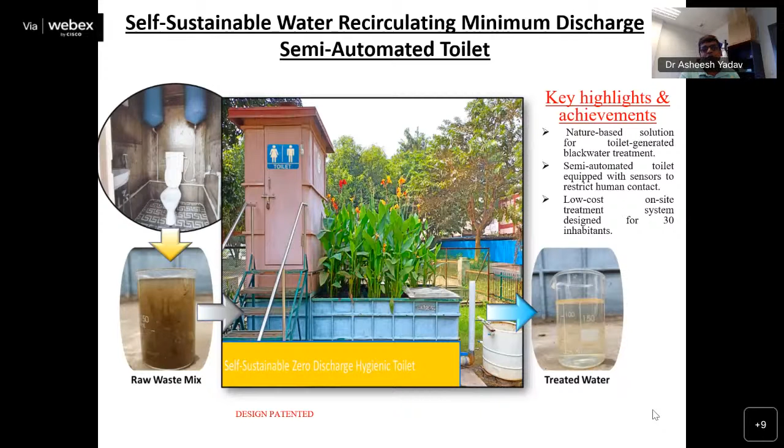So here we are using this nature-based solution in public toilets, and it is ready, and this toilet model is working in our campus. We have taken a design patent on this aspect, and I'm really impressed with this simple solution for use in toilets. Okay.

Then our same constructed wetland cum microbial fuel cell, we have tested it for many other purposes, like textile wastewater, and we were able to decolorize our textile wastewater and even mineralize the metabolites which are toxic. So we were completely able to mineralize the toxic pollutant to non-toxic. That is a big achievement, and we have taken a patent on this. So this is also one of the nature-based solutions.

Okay, so thank you. I have just included a few examples. There are many other things we are doing on this aspect. Thank you.

Thank you, sir. I think this is a very important presentation because constructed wetlands are very much here and implemented and talked across the country at various forums and platforms. One important question that you answered through your presentation was, do we have enough land to actually implement constructed wetlands in the country? Because if you see the kind of expansions we have in urban areas, we don't have enough open land to have this system. So thank you for sharing this next generation, next level constructed wetland technology, and also sharing this important insight on self-sustainable, zero discharge, hygienic toilets.

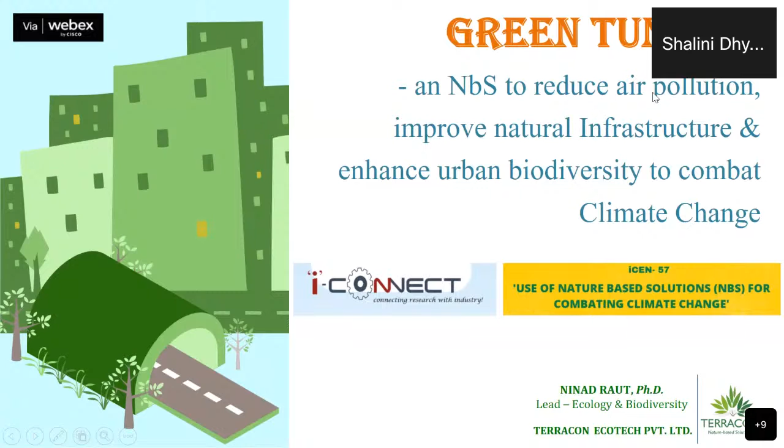So NBS, I guess a lot has been talked about NBS since the beginning of this session. It's very important, critical to address the climate change issues, and from the first speaker or the introductory video, we saw how difficult it is actually. Although we are creating impact on nature while developing a lot of stuff, it's very difficult to integrate biodiversity into the development. And that's more

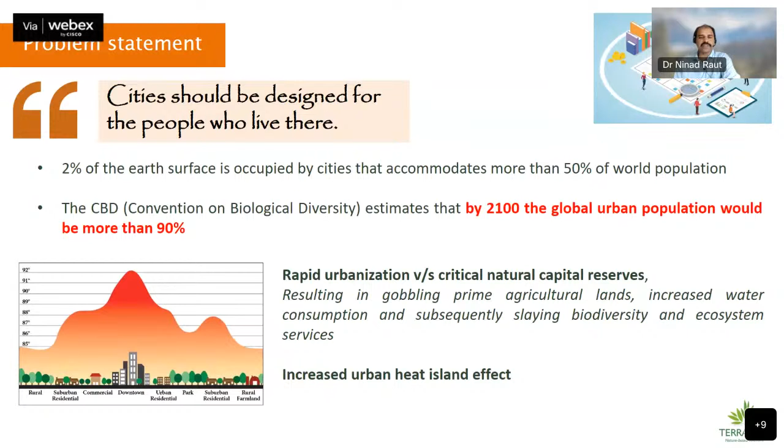when we are looking at the cities, because 2% of Earth's surface is occupied by cities, but almost 50% of the population is currently residing in them, and we are expecting that this number will increase to 90% by the year 2100. So this is rapid urbanization versus the critical natural capital reserves that we need for the well-being of mankind and especially our health. What are the things that are getting impacted due to developmental activities? One thing which is more talked about is urban heat islands and flash floods, or the microclimate level changes that are appearing.

So if we just take an example of a city like Mumbai, which is a metropolitan city, in the last 30 years we have lost almost 42% of green cover due to various activities. And majority of the times when we say development, road connectivity or the construction of roads becomes one of the primemost factors that fragments the habitat or creates a decline of the green cover. But that also has another impact on air pollution as well as the land surface temperature.

So when we are looking at greening the cities or urban biodiversity, what are these important for? We have talked about biodiversity or greening to the extent possible. However, the ecosystem services that biodiversity is providing, in addition to many other parameters, are enormous. It will not only create green cities, but it will also help in mitigating all types of pollution levels, the urban heat island effect, and also maintaining an ecological balance in the cities. It is already proved by much research that under the tree canopy, the temperature reduction has a good result.

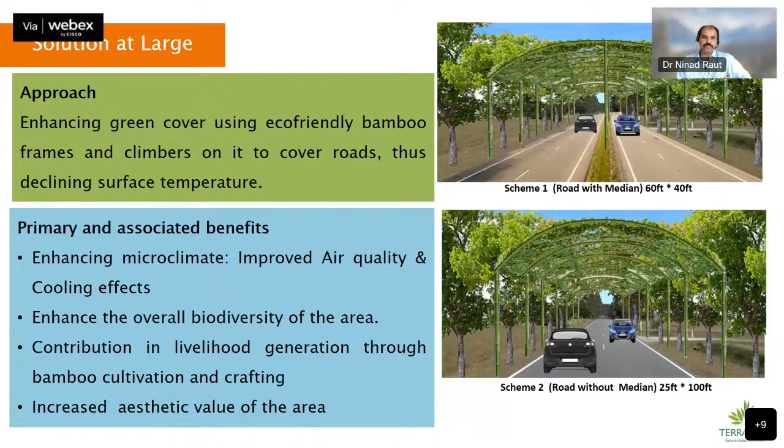Now, if you see, in the cities, although we talked about greening, many times the manicured landscape brings exotic species within the cities. That is also having an impact on the local biodiversity, and that is why we are proposing that native species of climbers should be used when we are promoting this green tunnel.

So the dimensions that we have thought about for this structure: the central height of the dome should be at least 18.5 feet, so that big vehicles can also move beneath. The length of a bamboo should be at least 16 feet. If there are trees, it will be placed in between trees, and a 1 meter spacing will be given from the trees so that the canopies will not clash with each other. And a width of 1 meter on each side will be considered.

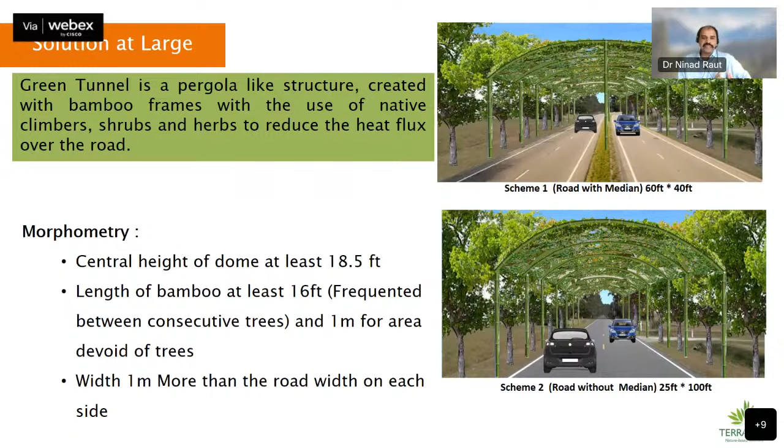The resource material required for this: essentially we'll have to develop a nursery, because we are talking about native climbers, and to increase the nature verges along the roads or along the medians, shrub and herb species capable of taking the roadside loads of pollution dust will have to be raised. This nursery will be developed in such a way that the saplings will be available at a local level. And for the green tunnel structure, because this is going to hold the entire structure, bamboo poles as well as bamboo mats will be used.

There will be climbers planted along the poles. Coir ropes will be used to tie up the structure, and a checkered pattern for the roof portion will be used to ensure that the street lighting will also trickle in between, so that it won't be dark and we are not again depending on the lighting of the road.

It will require seasonal maintenance. A solar pump will be used to irrigate the climbers, and obviously we'll have to introduce drip irrigation so that it will be maintained in that way. We are also proposing to use instruments to understand the difference between the experimental areas as well as the control areas.

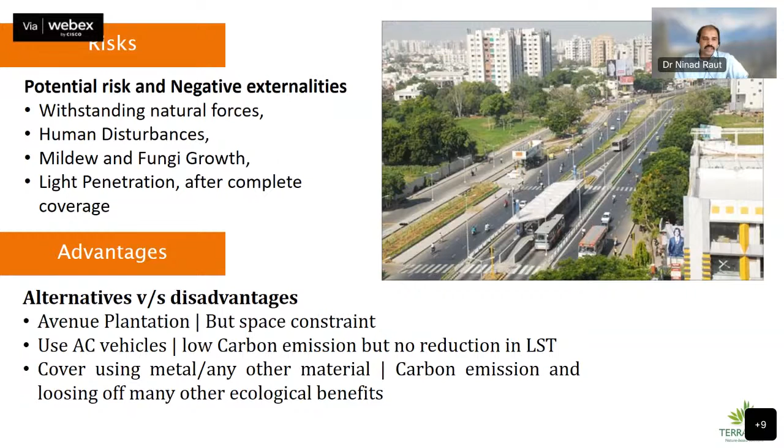2 minutes to finish. Yeah, sure.

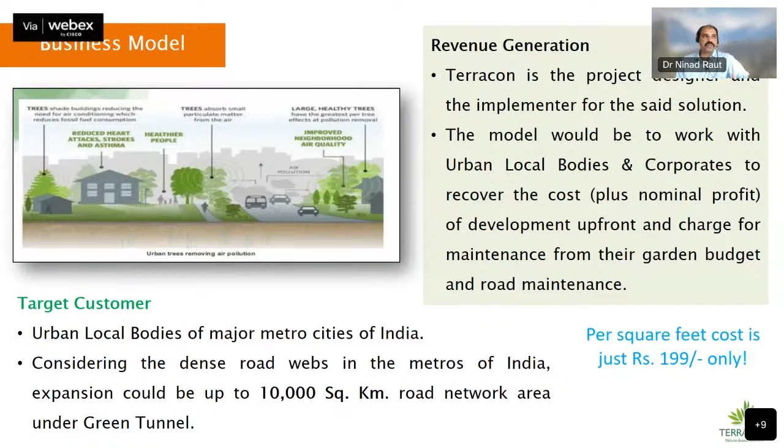Losing many ecological benefits. So this is the business model that we are proposing, with Terracon as project designer and implementer, and we think urban local bodies, corporates and industries should take up this model. If the urban local bodies of India get into it, we have around 10,000 square kilometers of road network that can be converted, and that will be a huge reduction in temperature, contributing to our commitments to the international conventions.

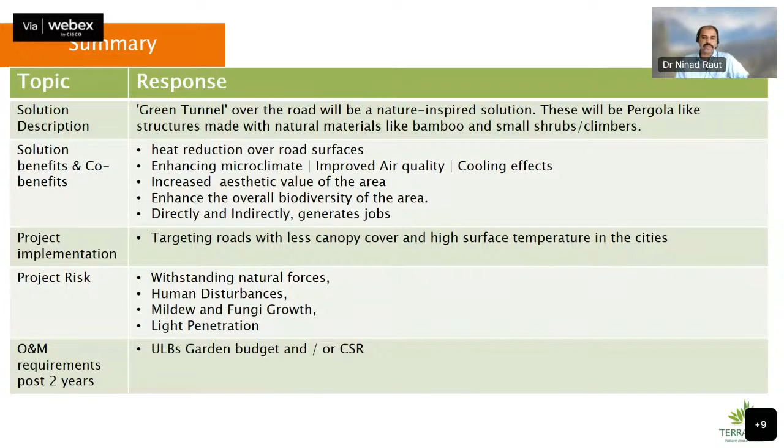So to summarize, this green tunnel solution is what we are targeting to act as a nature-based solution to address climate change related issues like air pollution reduction and land surface temperature. And we, being a consulting agency now getting into the execution or implementation role, have been working for the last 10 years in the domain of ecology and biodiversity, providing solutions to our clientele. We are looking forward to implementing this on a bigger platform and in various cities.

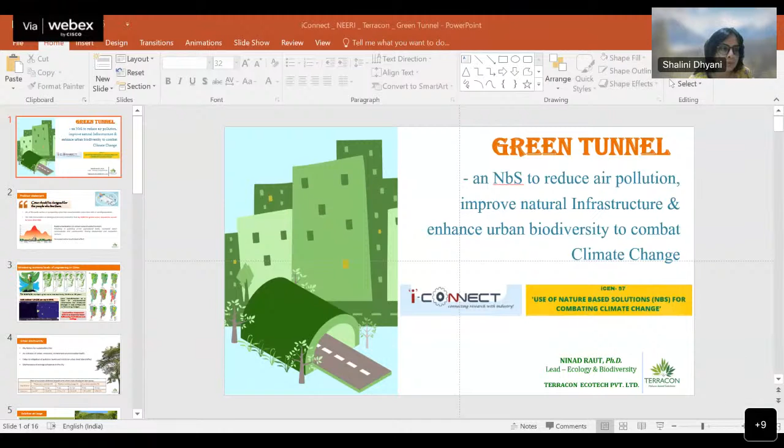I think what you are targeting through Terracon is important, though it's in the conceptual stage. Some relevant suggestions from CSIR would be to look at plants that are more native and at the same time have excellent air pollution tolerance, a good root system to improve groundwater percolation, and a broad leaf system that can help improve noise attenuation, because CSIR NEERI has implemented a national green highway close to Nagpur. That's about 7 kilometers, 7 years of work that has been implemented.

So I'm sure it can be a good idea to have that approach in mind, and you may like to refer to that approach. But I'm sure your approach itself is good for urban areas and can be a good take-up area or concept for not only corporates but also urban planners.